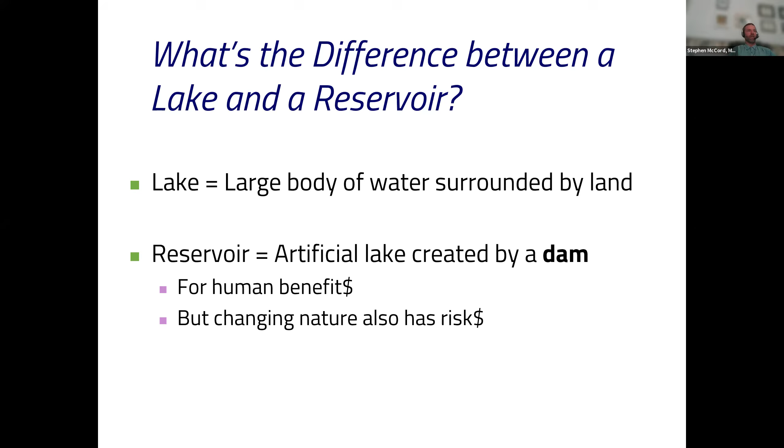Another key point is the difference between a lake and a reservoir. We refer to ourselves as the California Lake Management Society, and there are different definitions, but the broadest one that applies here is that a lake is a large body of water surrounded by land - very generic. A reservoir is specific: it's an artificial lake created by a dam. Often the definitions say a dam on a creek, but in California we have dams that are off channel, so we kept it more generic. The key things that make it different are that it's for human benefits - notice I put a dollar sign in there - and it also changes nature, and there are some risks associated with that. Today when we're talking about dam safety, that's a key risk. You put up a dam, you create these benefits, but now you have a risk downstream, and this is what we want to avoid.

I met Param, our first speaker, around when the Oroville issue came up, I think in 2017. This is a concern folks have everywhere, that a reservoir spillway or dam at some level is going to fail. These are pictures that were going around on the internet, and downstream communities were evacuated temporarily. Since then it's been very much, remember Oroville, let's not let this happen again.

Param's on the front lines of addressing that with the Department of Water Resources. Our second speaker is going to be talking about a specific issue in a specific area with seismic concerns, but I'll get to that next.

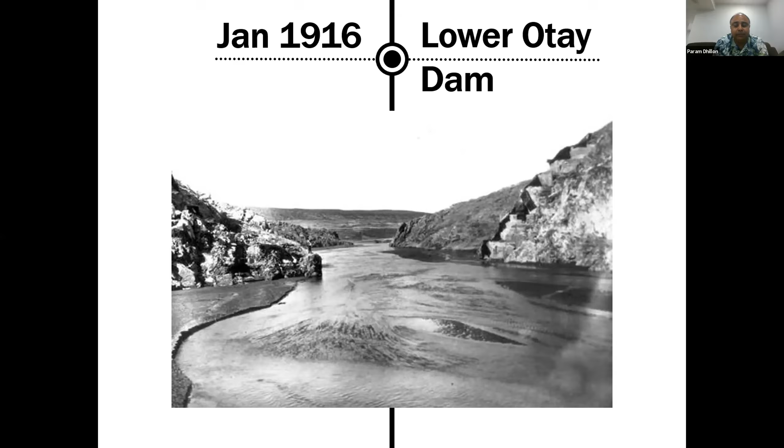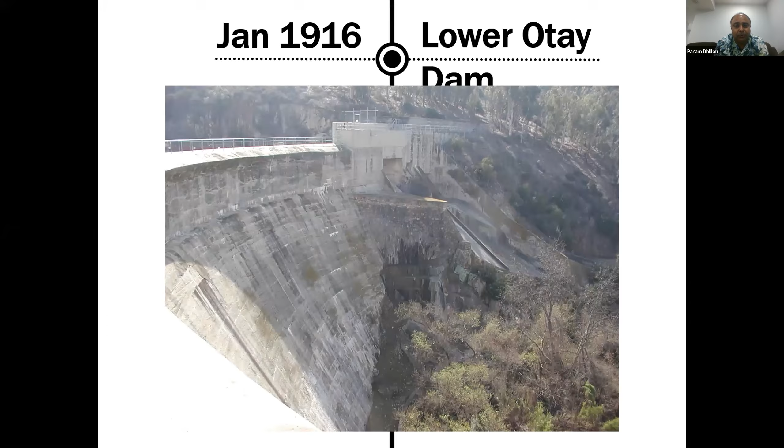1917 was when the first Dam Safety Act got enacted, but that was very, very generic, saying that everybody should be aware that there may be some potential for failure of dams, so everybody should do their due diligence to make sure the dams are built properly. But there was no oversight by any state agency or whatnot - it was all self-regulatory.

Then comes 1928. This is St. Francis Dam, this was right after construction. This dam was one of the bigger dams back in those days. As you see, there's some leakage right in the middle of this dam. This started soon after the dam was built, so everybody sort of had some idea that this thing is having issues.

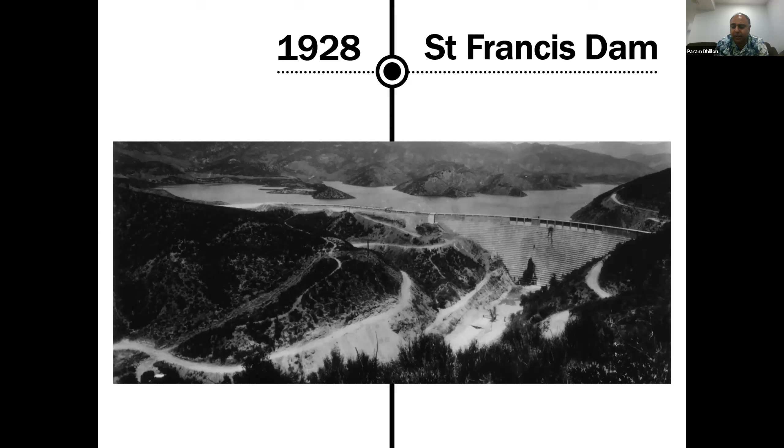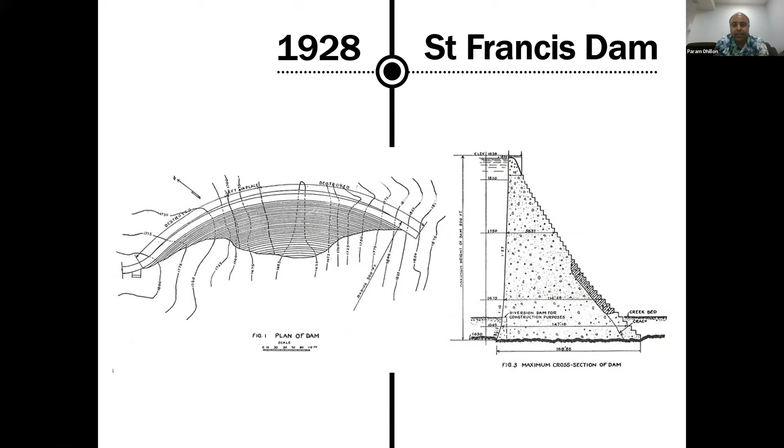So this is one of the pictures taken not too far before it failed. This is basically a concrete structure, a cross section and plan view of the dam. Look at the bottom of this bottom right picture. The dam is quite thick at the bottom, 166 feet wide at the bottom. So that's a good cross section, meaning these dams should withstand everything. But look at this dam now after failure.

What the designers did not put effort into was the abutments. Just like Sweetwater Dam, the dam itself survived, but the abutments washed away. And once the abutments go bad, this is the kind of things that happen to a dam.

By the way, there were about 400 fatalities after this failure. This failure happened in the middle of the night, so a lot of people got killed.

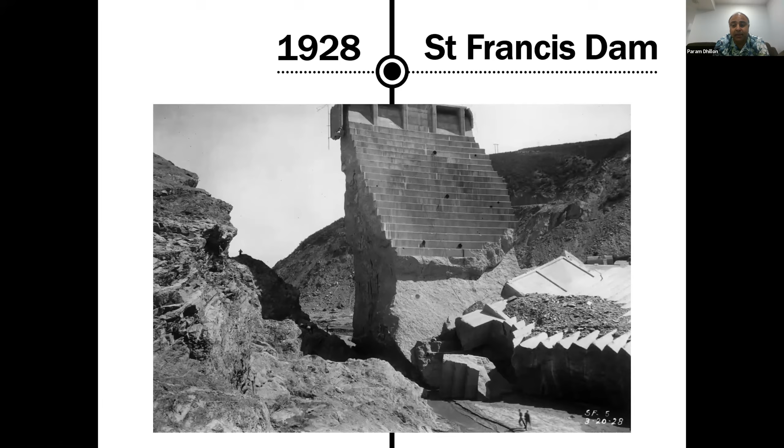This is another shot of the dam after failure for scale. Look at the gentleman right in the middle with a cane. And we are basically looking from the downstream side, looking at the reservoir.

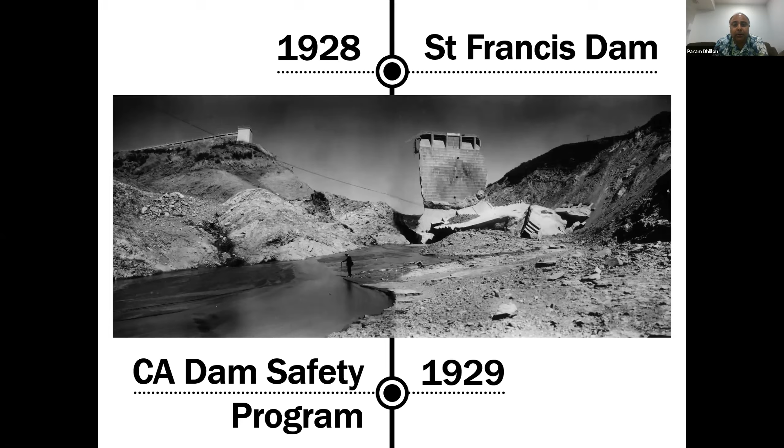And because of St. Francis Dam, 1929, that's how we came into existence. And that's the reason we are here today. So we have been managing every dam project since 1929. And the way we worked was we first brought all the dams which were not under jurisdiction into a jurisdiction. And once we did that, we also started looking at all the future dams which were being built.

Then come along 1963. So before that, only dams we used to look at were on-stream storage, not off-stream reservoirs. Baldwin Hills Dam is basically an off-stream reservoir where water was being pumped into it, and then it was being supplied to the cities downstream for water needs.

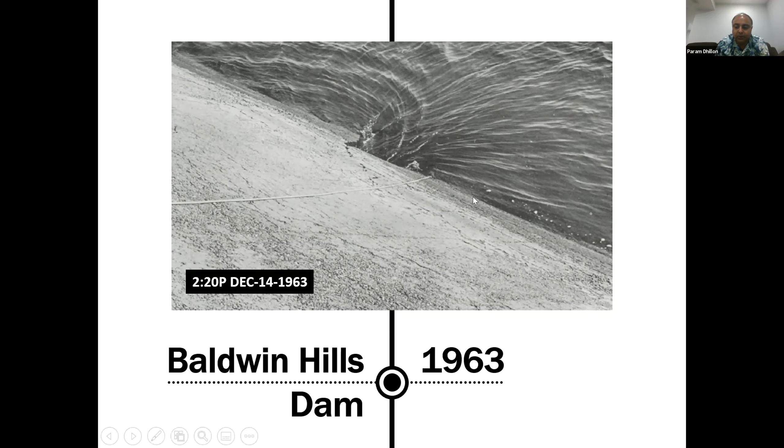At 2:20 p.m., a few minutes later, look at the size of this hole starting to increase. And look at the brave soul standing right there next to that sinkhole. I definitely wouldn't do that.

Now, as they're draining the reservoir, they immediately start draining it, but fissures already opened up. One fissure is right here on the top, and then other fissures are down here. By this time, downstream and all the drains were flushed with muddy sediment, meaning the drains got compromised on this dam.

As you see now, the hole is starting to get bigger, and the fissures going up above towards the crest are getting longer in length. Notice the timestamp on this. This only took about 1 hour, between 2:20 and 3:25.

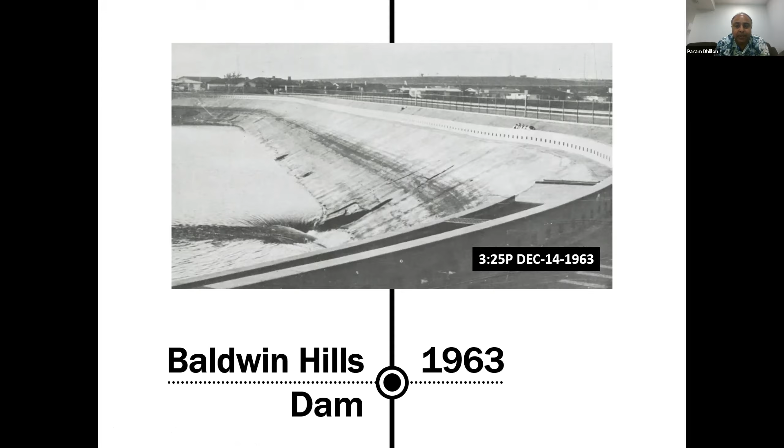The reservoir got dropped from that water line, which you see here, down to this elevation, but the damage was already done. The fissures were opening up, and the downstream drains were fully compromised by this time. This is what happened at 3:30, exactly 1 hour, 10 minutes since that dam tender saw that fissure. Notice another thing, the reservoir is still being dropped. They were using low-level outlets to drop the reservoir. So imagine if the full reservoir failed under this condition, it would have been very, very bad.

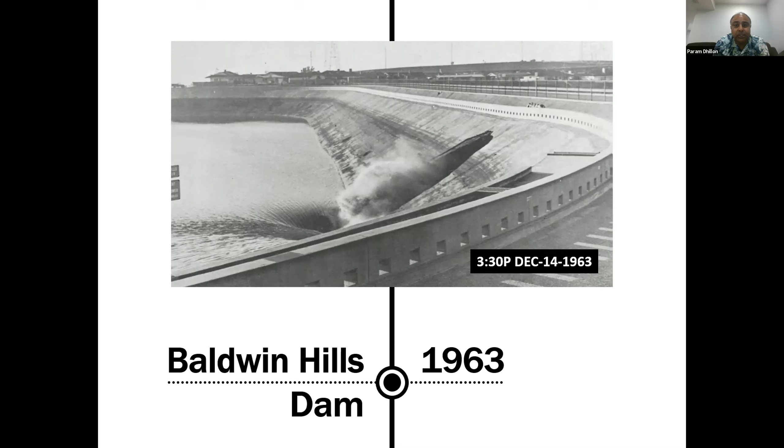But they were able to reduce the volume in the reservoir by using low-level outlets and draining it. But still, this dam completely breached around 3:35, almost 1 hour, 15 minutes later after the start of the first sinkhole. So after that, Baldwin Hills Dam, all reservoirs which are pumped reservoirs, also became under a state dam safety jurisdiction.

And here's a complete breach. And this is on the downstream side.

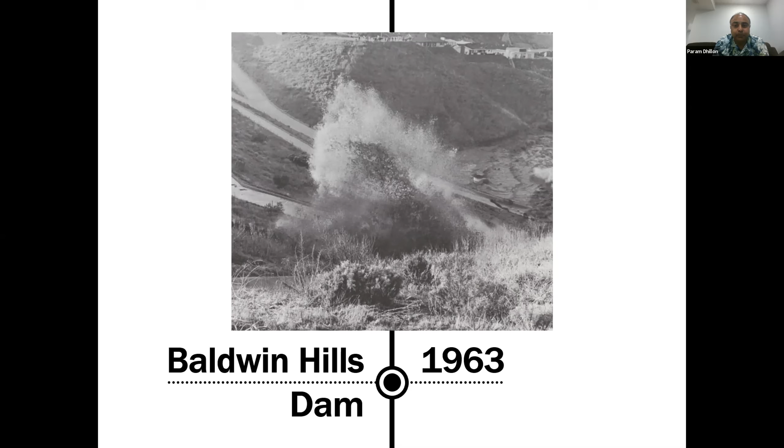And this is a full breach failure of the dam. So as you see, dams can do quite a bit of damage.

Then I want to show you a case of the 1971 Lower San Fernando Dam. Back in the early days, because equipment wasn't available, a lot of this dam construction was done using hydraulic fill methods, where you basically sluice the material between two rock berms and fill up the dam. The sediments settle in the middle of the dam, and the coarse sediments are on the sides, and you create your embankment.

But the problem with these kinds of dams was that they were very liquefiable, meaning a small earthquake will just slide these faces out. Imagine just like a landslide—when the landslide gets saturated, it slides out. That's exactly what happened at the Lower San Fernando Dam in 1971.

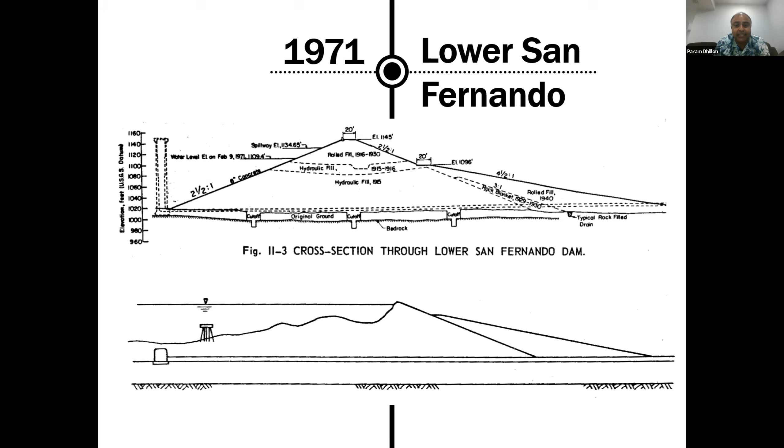One thing we did when we brought these dams under jurisdiction, once we figured out that a lot of these dams were built with hydraulic fill techniques, was to permanently restrict the storage. This dam was always held 10 feet below the spillway crest, so it was never full, because looking at this shot downstream, you can imagine what could happen if the reservoir was full and this dam failed.

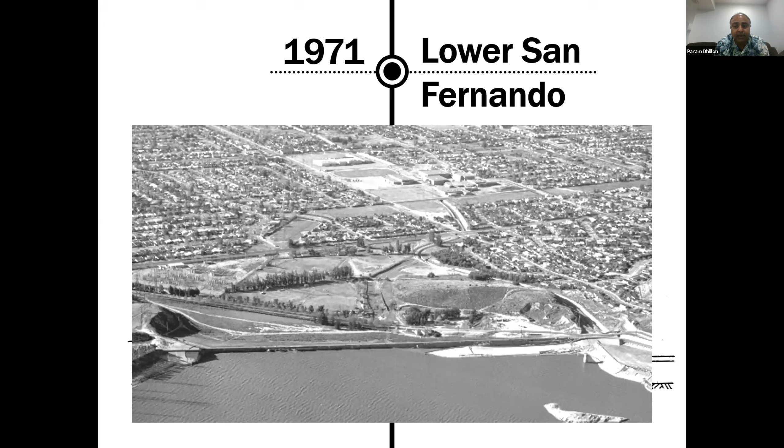So in 1971, after an earthquake, this is what happened to the upstream slope of the reservoir—it basically just slid into the reservoir. And this was under the full restriction of 10 feet.

And this is another shot. I wanted to show you that low-level outlet. Once again, the low-level outlet became critical because as soon as the earthquake hit, we were able to open the low-level outlet tower gates and evacuate as much water as we could. There were some aftershocks too, but we were able to prevent full failure or breach of this reservoir.

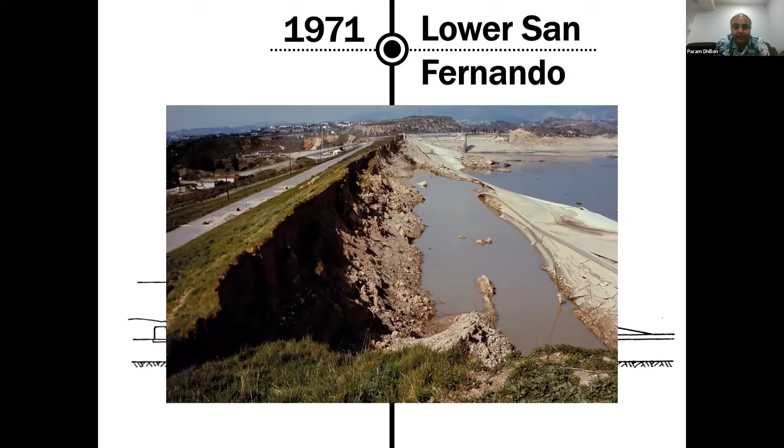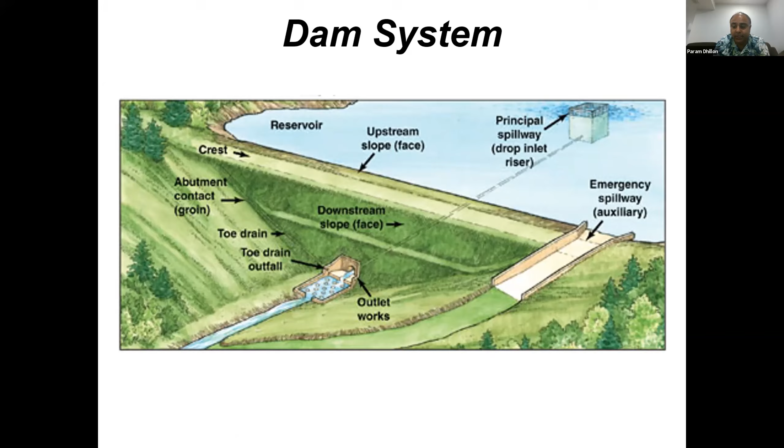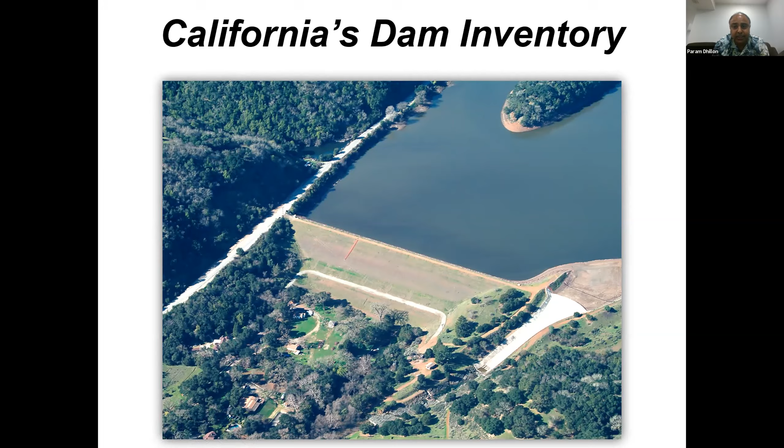This one doesn't have any outlet tower, so most likely the low-level outlet is buried—it's inside the reservoir, but there's a low-level outlet pipe underneath, and the pipe probably exits out here. You have the spillway on the right side. This looks like a large dam, because judging by the spillway construction, this reservoir sees quite decent flows come through.

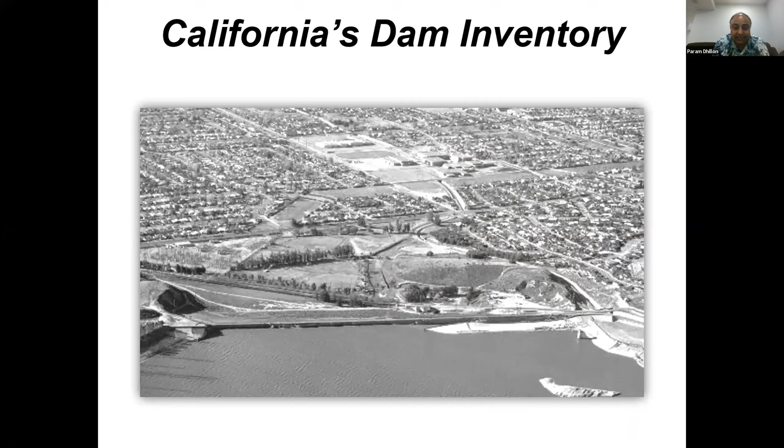This is another picture of San Fernando, basically telling you this is a hydraulic dam, hydraulically filled, and that was the reason this one failed.

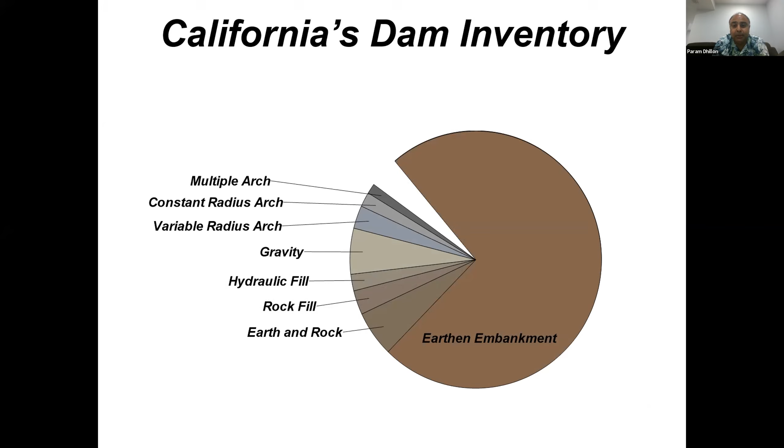After that, we go into concrete dams, and we have a variety of dams in concrete. We have variable arch structure, gravity, constant arch, multiple arch. So let's look at some pictures so all this jargon makes sense.

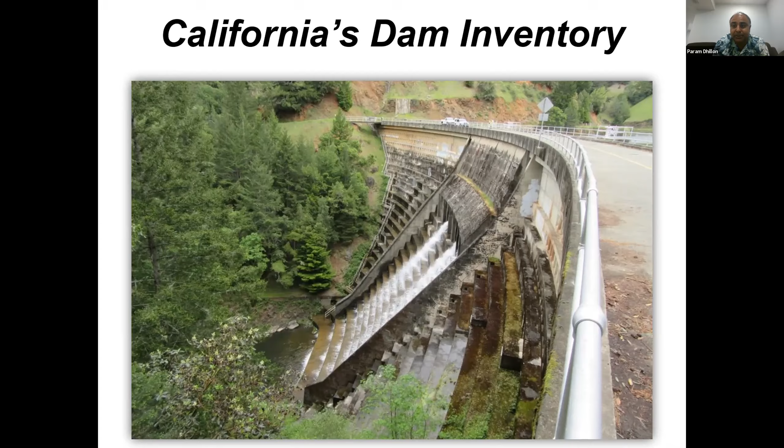This is a roller compacted concrete dam called San Vicente, in San Diego. This was one of our bigger projects, which we just completed a couple of years ago. The reservoir capacity used to be 90,000 acre feet, and now it's almost double that. I have a cool video which I'm going to run for you guys to see how this dam was built.

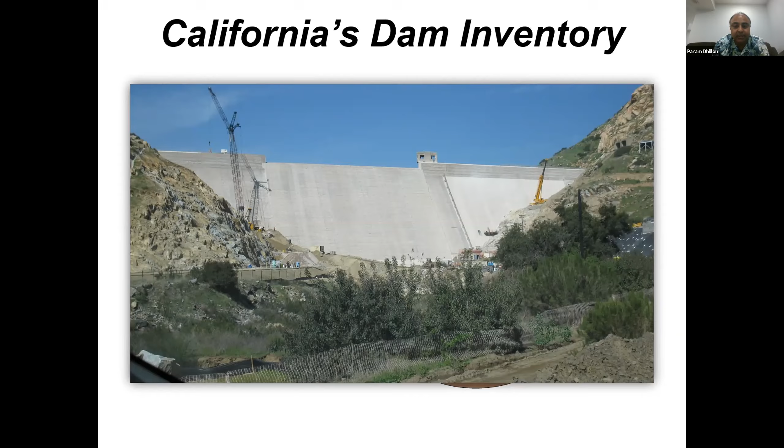Basically, this is the old dam, and the new dam was built right in front of it, and they were tied together. I have a time-lapse video which I'm going to play now. Sorry, the video didn't play. Sorry, gentlemen and ladies, the video didn't play.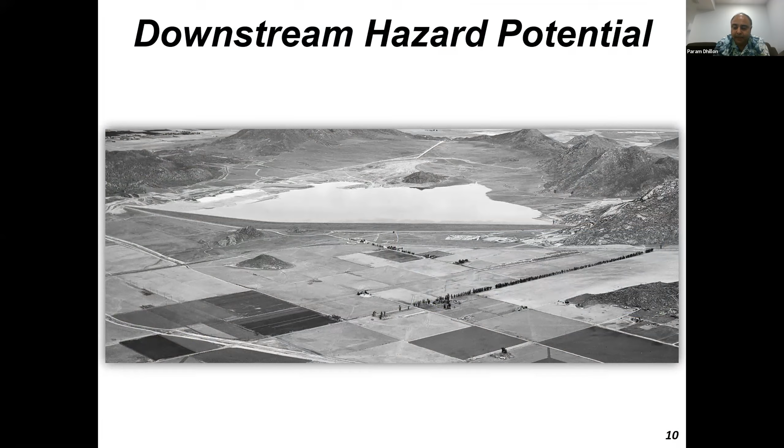One of the things we are grappling with now is the downstream development around dams. This picture was taken in the 1970s, I believe. This is the Perris dam up in Southern California, a state of California dam. When the dam was originally built, there was no housing downstream of it - there was no issue. This is a recent picture taken a few years ago. As you see, the dam which was built without any downstream hazard has now become a major hazard.

That's something we have been grappling with since the Oroville disaster. Here's a picture which should show you what happened between 1974 and 2014. The reason I'm showing this picture is that it's going to become important because after Oroville, legislation was passed which basically required every dam to develop an EAP, except for low hazard dams.

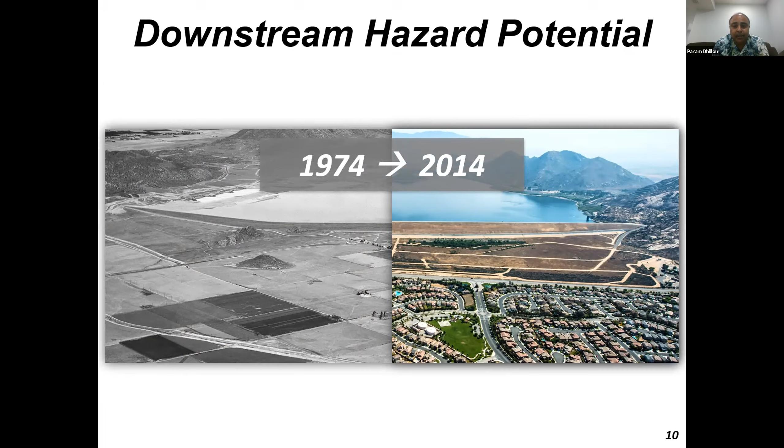This screen shows how many dams we have in the state of California. We have about 1,250 dams. Out of those, 204 dams are extremely high hazard, and 440 are high. Then we have about 277 dams which are significant, and about 327 dams which are low.

Here I'm going to plot, so you can see the color coding of these extremely high hazard dams. As expected, a lot of these are in Southern California, Northern California, the Bay Area, and along the foothills in the High Sierra.

Now what I did is plot some major faults. As you can see, a lot of these dams, especially the high hazard and extremely high hazard ones, are along these fault lines.

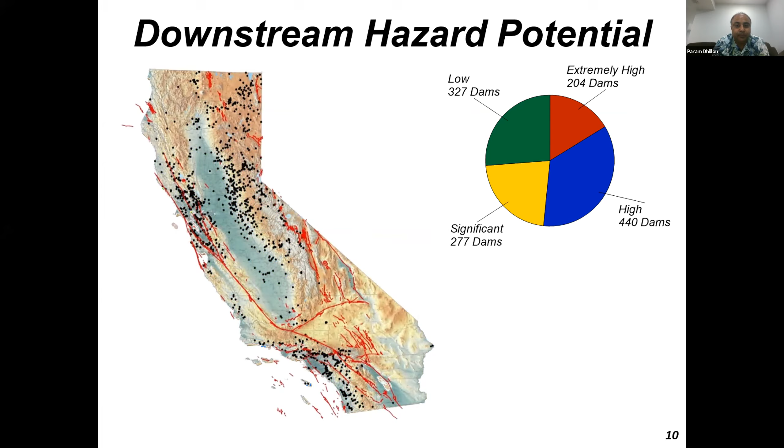This is how our division is set up. We have the office chief, then our own engineering geology branch, field branch. This is where I work now, the design branch, where I used to work, and then the reevaluation engineering branch, which I also worked in years ago. And then of course we have support staff to support us.

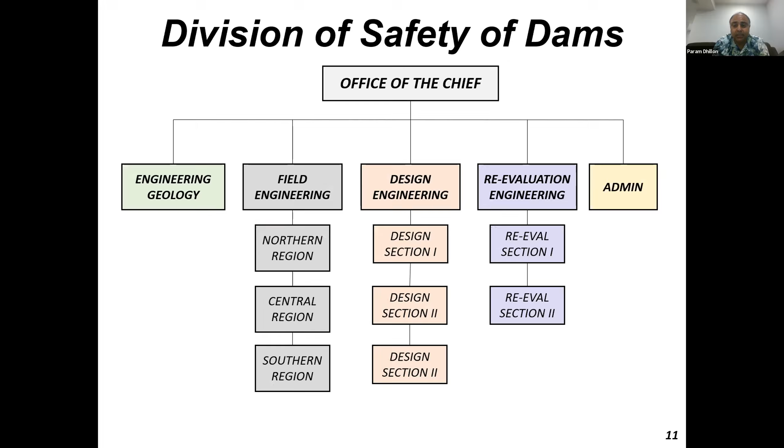One of the things we also do in-house is, regardless of whether an owner wants to do their own study, we do our own independent studies on every structure within the state of California. This is an earthen embankment, just as an example, and we do our own analysis to figure out if the embankment meets minimum safety standards or not.

This is one of the projects we completed a few years ago. Imagine a swimming pool downstream of a dam filled with kids, and nobody knows what this dam is worth, or if it's going to hold together. That was one of the reasons we evaluated this dam, to make sure the swimming pool is safe, because there are a lot of people in that pool.

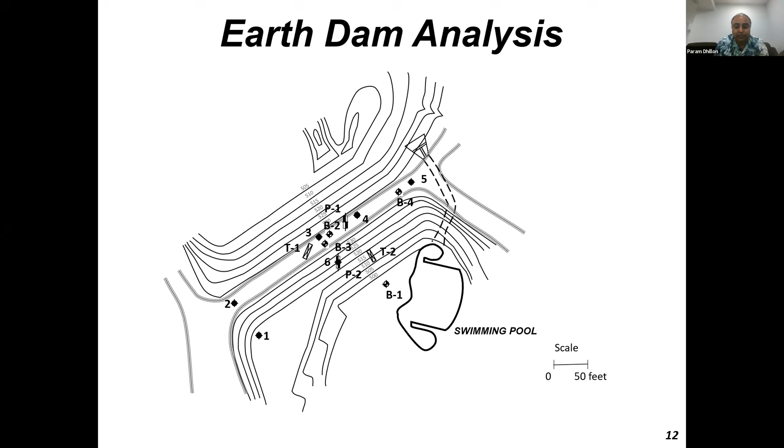Another analysis we do is a typical standard slope failure analysis. Everybody in our division is capable of doing it, and all 1,200 dams go through this evaluation.

Another way, and for some of the engineering folks in the group, this is how we do our seismic analysis. We put these dams through seismic analysis and figure out if they meet our minimum safety standards.

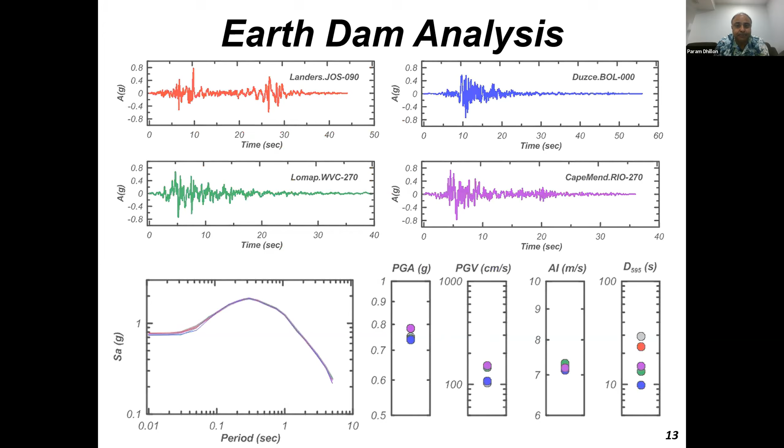So these are all typical analyses we are doing on these structures, and they're all independent of the dam owners. Dam owners also do their own, but we also check and verify.

Then the next portfolio group we have is our concrete dams. We use various software such as SAP 2000 and LS-DYNA to evaluate these concrete structures.

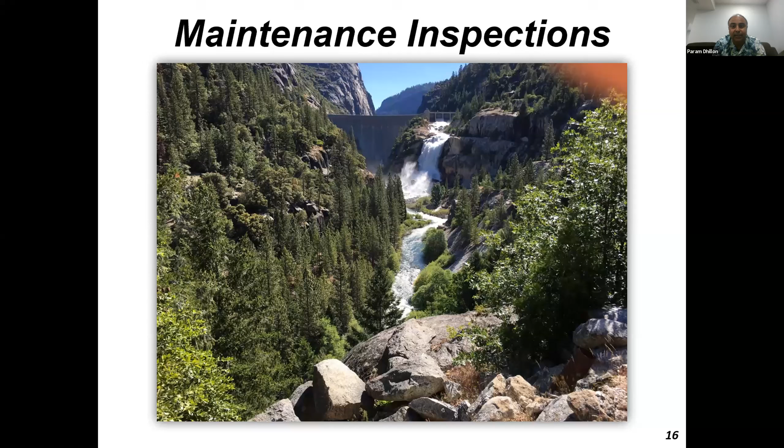Maintenance inspection is one of our biggest jobs in the division. We inspect all 1,250 dams annually. That's quite a bit of dams. This is one of the shots I took years ago of Donnell's Dam up along Highway 108. I was heading up there to inspect, and this was a cool picture.

This is another kind of dam. This is a rockfill dam up in the High Sierras, and these are inspected annually. Some of the extremely high hazard dams are inspected twice a year, depending on if there are any issues we're concerned about.

On an inspection like this, we will walk the left groin, which is along this side safely, then walk along the toe, then walk around the right groin, and walk on the upstream face if it's easily available. We exercise the valves, cycle the spillway gates if available, and cycle the low-level outlets.

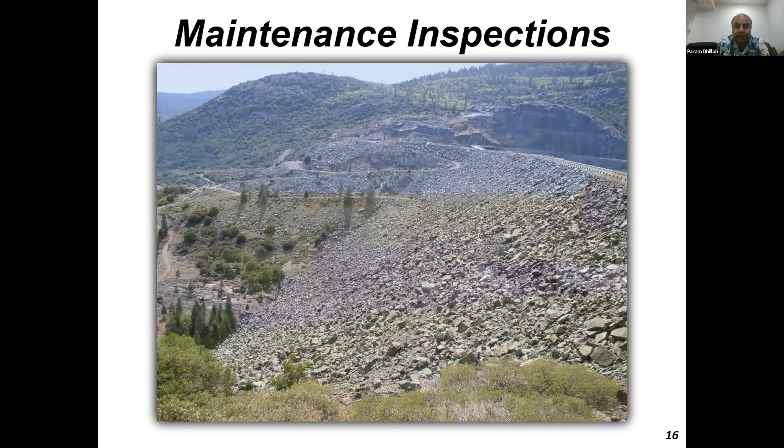This is another small structure. We look at big dams, small dams, farm dams, and some homeowners association dams. We have a vast variety of ownership, including Southern Cal Edison, PG&E, LADWP, State Water Resources dams, and a lot of farming dams.

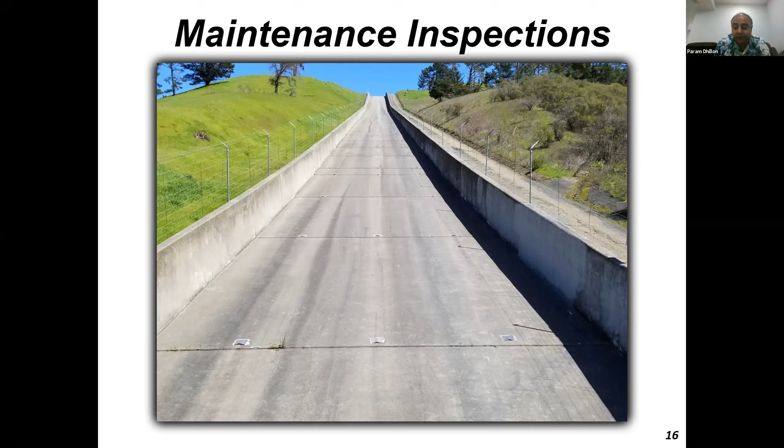Our inspections always involve walking around the spillway chutes, making sure the spillway is in good condition for usage. We walk through lots of tunnels—this is a nice tunnel with not too much water—but we also have tunnels where we are waist deep in water, wading through to check things.

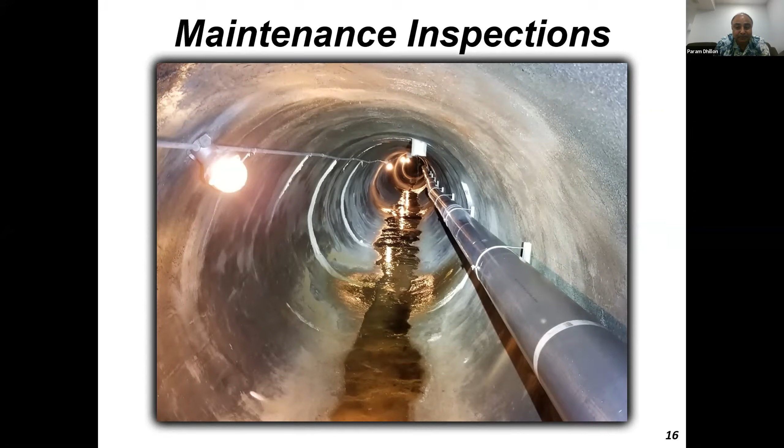For radial gates, we have our own team that actually climbs the gates every so often to make sure they're performing well. We also have a special program where every third year, all radial gates need to be cycled in DSOD's presence.

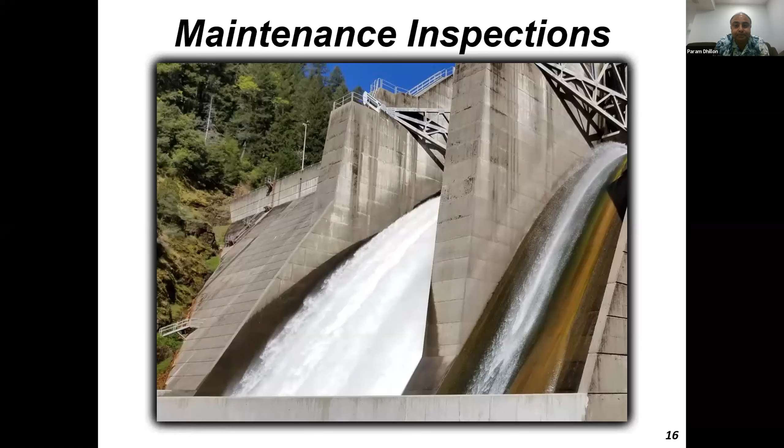This is another shot of the radial gate on the right side. As you can see, there's some leakage.

We always cycle low-level outlet controls. This is one of a massive dam with a low-level outlet control being cycled on an annual basis.

This is one of the dams we also inspect, which basically involves walking up the groin. That's a lot of stairs on both sides to get to the dam, but this is done annually or biannually.

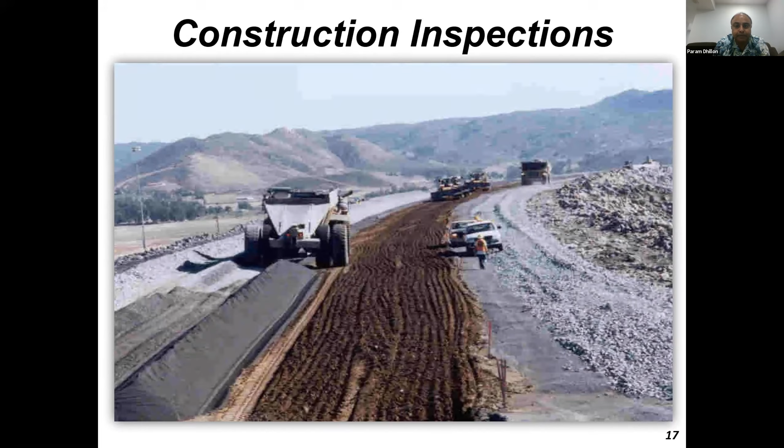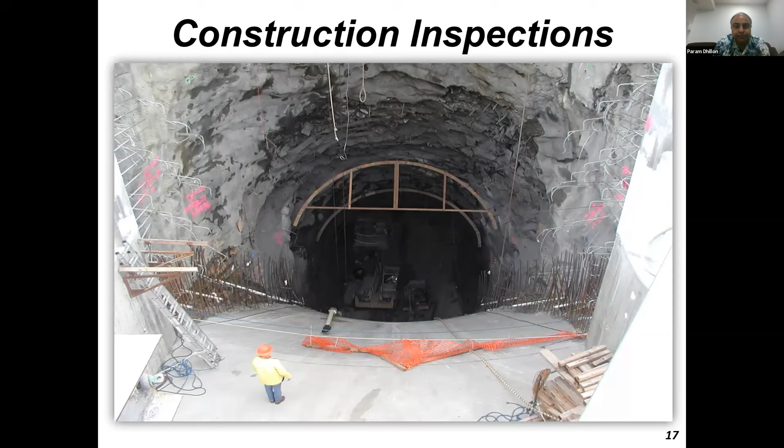This is a dam where we basically removed the old low-level outlet liners and put in new ones. At the bottom right, you'll see those steel pipes. We pulled out the old pipes and installed three new pipes, then put brand new slide gates on the upstream side of this dam.

Maybe this is where the video will work, I was having issues. So remember I talked about San Vicente Dam? This is the construction of the San Vicente Dam in the San Diego area. The original dam was about 220 feet, but now it's at about 350 feet in height. The reservoir basically doubled. This is all drinking water for the San Diego area.

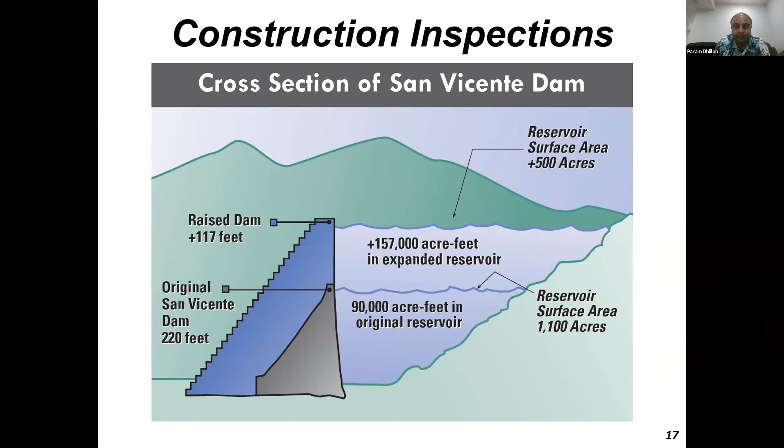As I said, this was the original dam, and now I think the video might play. There we go. Param, how many more slides do you have? I have about... I can skip through some. Am I coming on time here? Yep, okay. How many more minutes do I have, Stephen? A couple. Oh, okay, I can go through it. All right, great.

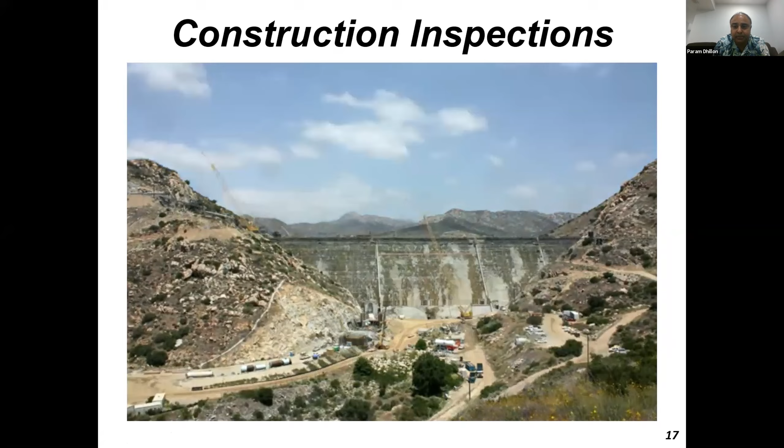So you see here, the new dam is being built in the front, and it's being tied to the old dam. We are right now at the crest of the old dam, and the new dam moved up by 120 feet. This was one of the largest raises in California.

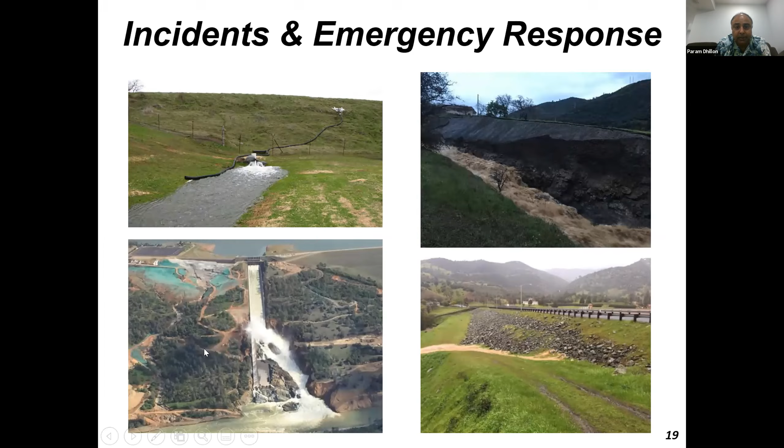This is one of the biggest things: we do not allow overtopping of embankment dams. This is just the kind of failures we see. There's a leakage on the bottom right, you see the reservoir leaking. Top right, spillway walls failing. Obviously bottom left is Oroville, and top left is where you have leakage through the embankment.

Stephen, I think I'm going to probably go toward the end now because timing is going to be an issue. Yep, so that way. So one of our biggest challenges right now is this slide. I wanted to make sure I could show this.

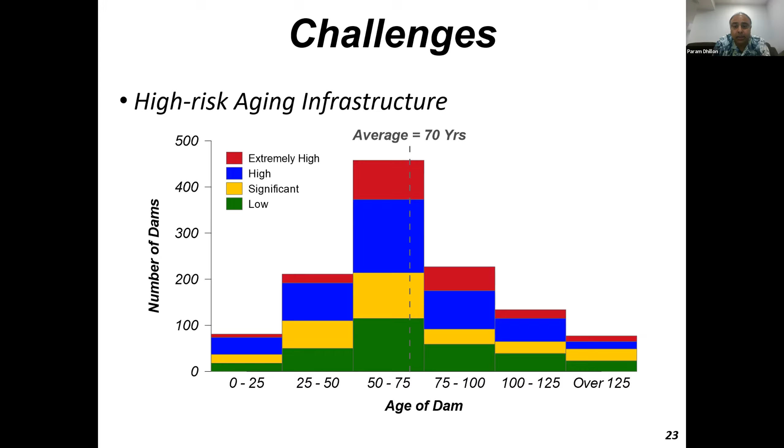This structure—right now the majority of the dams in California are between 50 and 75 years old. But guess what, the majority of our high hazard dams are at that age. Look on the top, look on the left side, and you'll see that the majority of our extremely high hazard dams are about 70, 75 years plus. So this is one of the challenges the division is facing moving forward: how are we going to manage our portfolio given these risk assessment scenarios.

High risk aging infrastructure, resource and funding limitations. Another thing we are running across is dam safety expertise. Most of the people who worked in the industry have retired, and the talent pool is quite shrinking.

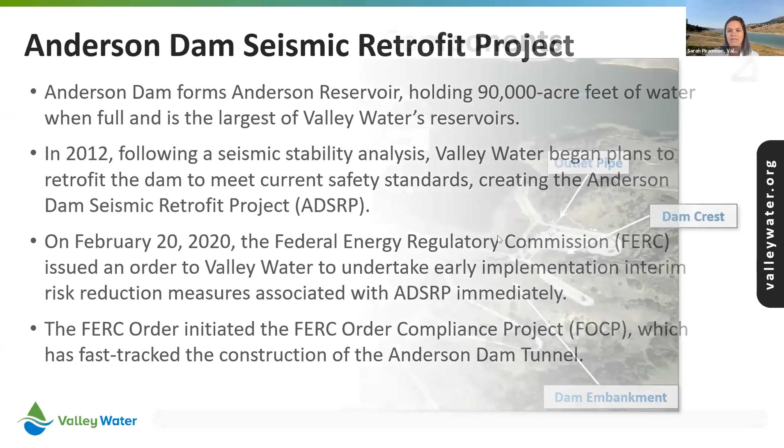All right, so this is just an overview of what our dam looks like from the top. Some of those same components that were introduced earlier - so it's our earthen embankment. And you can see this is actually where two creeks converge, and they would go through here.

It's called Coyote Creek, and underneath this earthen dam is some liquefiable material, so that's one of the big concerns. We also have a spillway here that doesn't meet modern spillway standards, and our outlet pipe is also vulnerable to fault rupture.

So some of the existing components that we're going to be retrofitting. This is another view of the dam from the top, and you can see that the embankment is pretty big. The larger retrofit project is going to have to scrape all the way down to bedrock, get rid of all the liquefiable material, and then rebuild it.

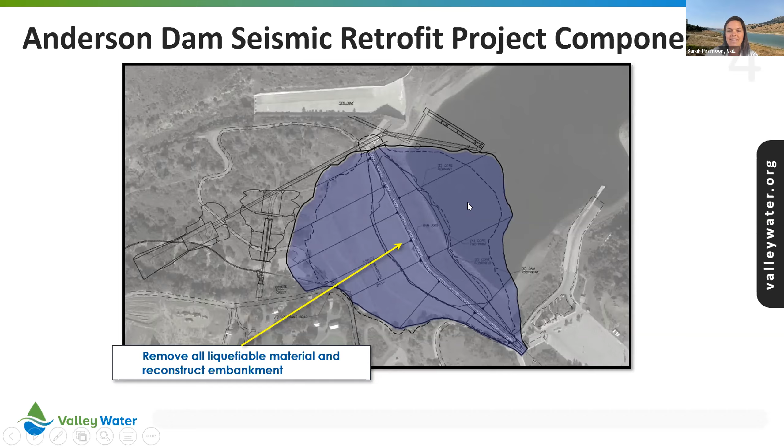It is going to take quite a few years, and it's compounded by the fact that this needs to remain safe throughout construction, because there are quite a few people who live downstream of this dam.

There's our spillway that will be retrofitted to post-Oroville standards. And here is our low-level outlet works. We currently have a low-level outlet works on the other side, and it's going to be moved to the other side. The temporary diversion system uses the same tunnel as our low-level outlet works.

This is the part of the project that we started now as part of our interim risk reduction measure. It's a massive tunnel that goes through the side of the abutment and underneath the dam, almost creating a big bathtub drain that could be used in an emergency. After the dam is constructed, that diversion structure will be repurposed as a high-level outlet works, a redundant system to our spillway.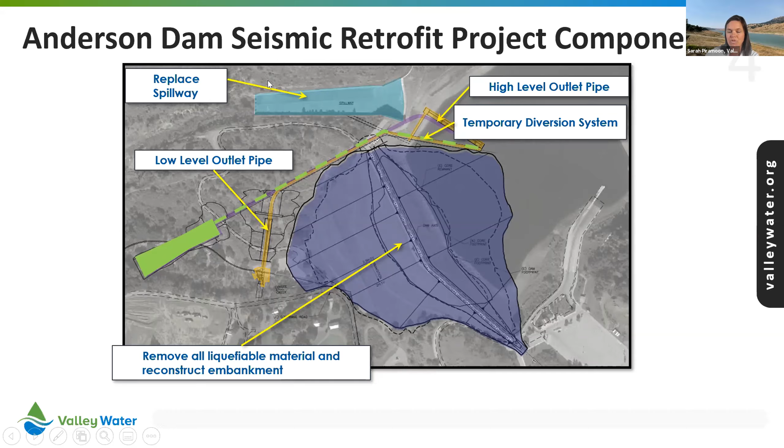And I do have a video here. I know, hopefully this will work, but we recently did start construction on the Anderson Dam Tunnel Project. It's pretty monumental, and this video has great footage of what it looks like from above, giving you that context of all the downstream communities and the constraints we're working with, as well as highlighting the involvement and support we've had from our elected officials. So let's hope this video works.

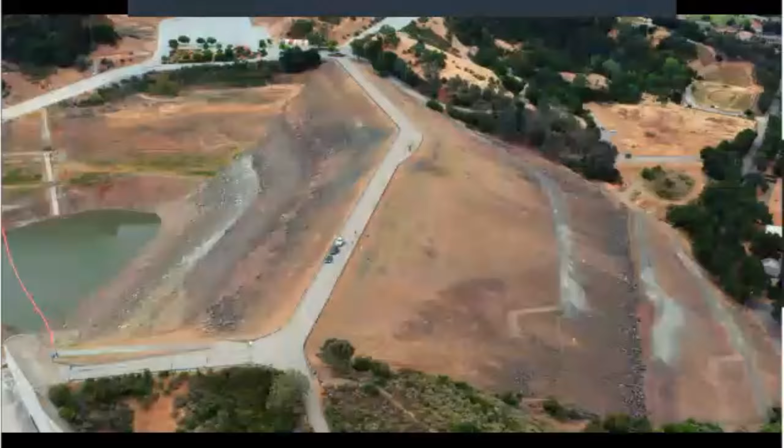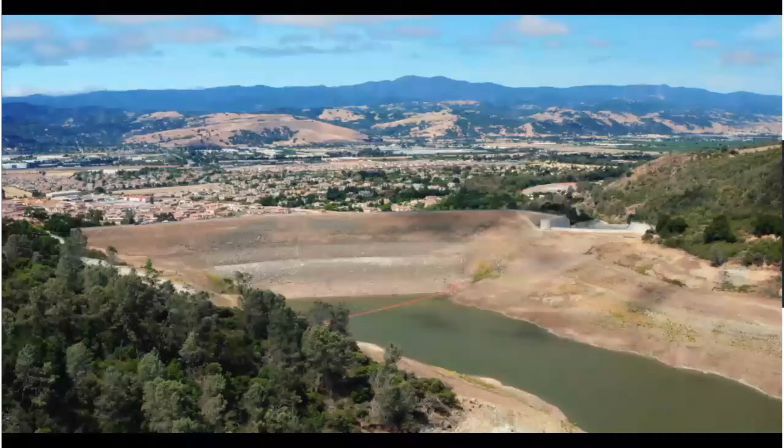Let's see if this works. It's always good to have these kind of ceremonies because this is the start of something big. Shovels in the ground. A critical project to protect the public and secure Santa Clara County's water supply is underway. Strengthening Anderson Dam, which impounds the largest reservoir in the county. The Anderson Dam seismic retrofit project will prevent it from slumping in the event of a large earthquake by rebuilding the dam built more than 70 years ago. Anderson Dam was a state-of-the-art project in 1950, but it was built near a seismic fault line. That is why we need to make sure it can withstand a large earthquake to the best of today's standards. A strong earthquake could damage the dam, causing a catastrophic release of a 30-foot wave of water that could inundate land more than 30 miles north to San Francisco Bay and more than 40 miles south to Monterey Bay, including much of Silicon Valley. At Valley Water, we are committed to protecting the community from the risks of earthquakes and other emergencies, like the severe drought currently impacting us. And that's why fixing Anderson Dam, which is our largest dam, is our top priority.

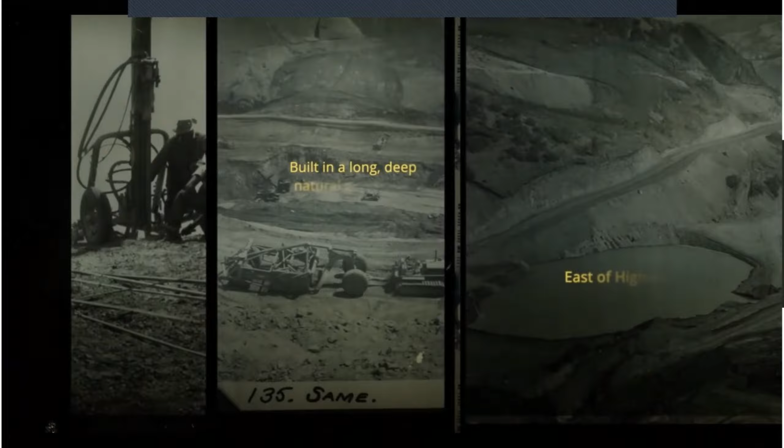Built in a long, deep natural gorge east of Highway 101 in Morgan Hill, Anderson Reservoir is named for Leroy Anderson, the first president of Santa Clara Valley Water District. Anderson stores local rain runoff and water pumped in through the Central Valley Project, an essential source of drinking water and groundwater replenishment. Anderson Reservoir is actually our largest of our 10 reservoirs. It can, at 90,000 acre-feet, hold the other 9 reservoirs within its footprint, so it's obviously a critical part of Valley Water's water supply portfolio. The reservoir can store enough water to serve about 1 million people for a year. Today, it sits nearly empty.

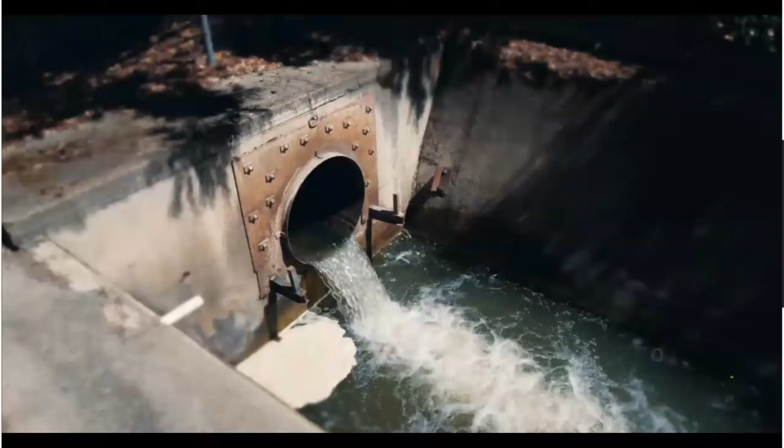The Federal Energy Regulatory Commission ordered Valley Water to drain the reservoir to 3% capacity to reduce seismic risk during construction. So for the next 4 years or so, you can expect the water level to get no higher than it is now. Probably year 5 on, we'll actually drain it so it's bone dry so we can do the embankment reconstruction. The first step is fast-track construction of a larger outlet tunnel, giving us greater control over water levels and increasing public safety. Then we'll rebuild the dam from the ground up.

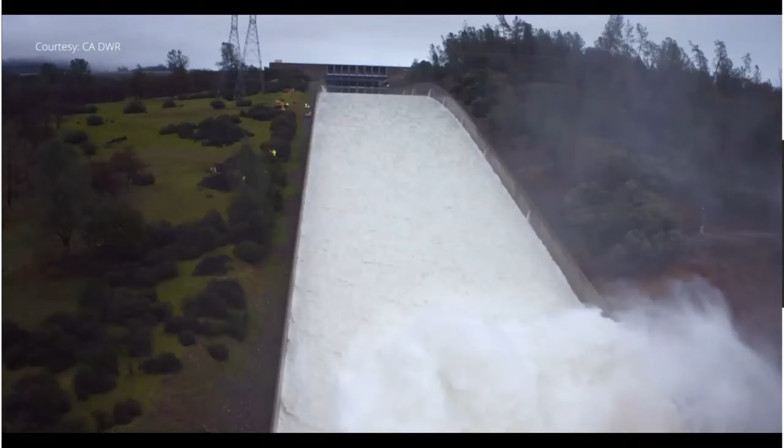When we originally started the project, we thought it was a 3-year project. The retrofit project has expanded 3 times since it began in 2012. Initial analysis indicated the dam didn't meet modern-day safety standards. Then in 2016, studies revealed previously unidentified fault lines, meaning more extensive work was needed. Then came 2017, the Oroville Dam spillway failure. In the wake of that crisis, new state standards required Valley Water to replace the spillway at Anderson Dam.

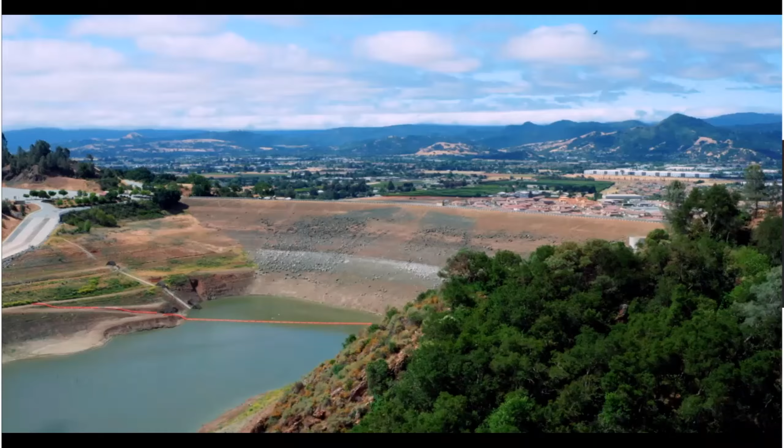Valley Water is working closely with state and federal regulators to modernize the dam for the long term, while minimizing impacts to ratepayers. There's actually over 13 agencies involved in permitting this project. It's been a monumental lift, and everyone understands the criticality of the facility at this point. It needs to get done. We can't have this just sitting out there, empty, and as a risk.

Beyond seismic safety and water supply, the retrofit helps prevent and reduce impacts to the environment and endangered fish. As part of a settlement challenging our water rights, Valley Water will restore habitat and provide water for endangered fish. As part of this project, we will be improving fish barriers downstream in Coyote Creek. We'll be restoring some areas that provide habitat to fisheries and wildlife. Once the project's completed, we're going to be in a better position to provide more water to the fishery in addition to providing water for water supply.

The project is expected to take 10 years, with the first few years spent constructing the new outlet tunnel and the next 7 to 8 years to completely rebuild the dam.

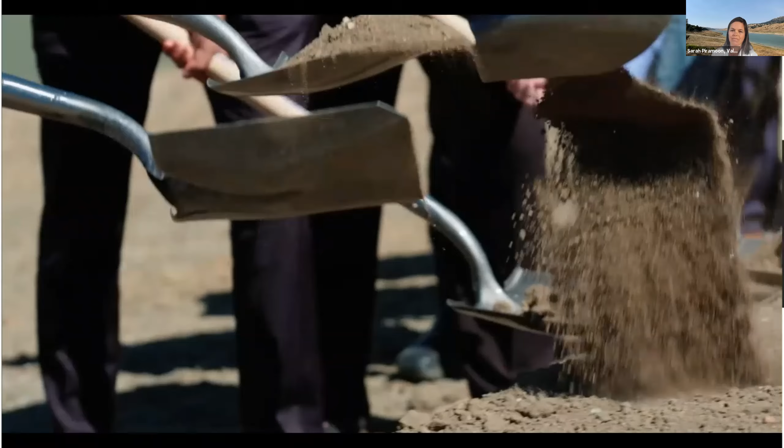This is truly not just about what's happening here, it's the impact it has for many, many miles around here. And ultimately, it's about our water safety, our water quality, water storage. So this is a regional project with regional protection. I just want to thank the district for taking on this gigantic public works project. It's a public project that's going to keep the community safer, that's going to protect our water supply, that's going to create jobs, and this can be a model not just for our county, but for the state and the country.

Oh, I'm very proud to be part of this project. This is a once-in-a-lifetime type project. It's the most important project for Valley Water today.

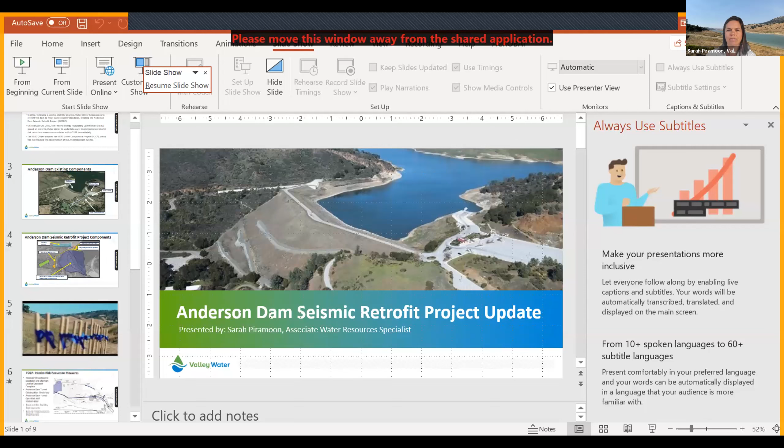Okay, so back to the technical pieces of it. We received that FERC order compliance project last February, and the video kind of showed it. The first part of it was to draw down the reservoir to the lowest point that we could, what we call the dead pool, or elevation 488—basically the lowest point we can drain it to with our existing intake structures. We've been able to maintain that elevation since last December. We had a dry winter, so it wasn't exactly easy, but we were able to do it. Sometimes this reservoir can fill up really fast, and that's part of the reason FERC really wanted us to get started on this tunnel project as fast as possible.

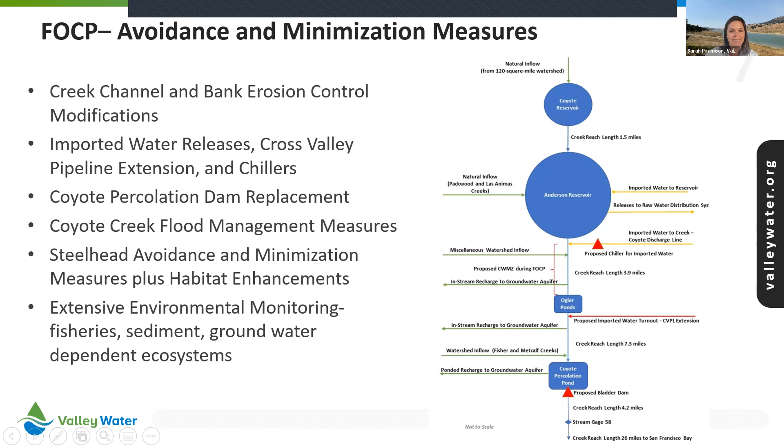With the FERC order, it really split our project into two different actions. So we're in this Anderson Dam tunnel phase, and they've just started construction on the tunnel. It's going to be another 3 years that we expect construction to happen on the tunnel itself.

Meanwhile, while that is all happening, and we've gotten all our permits underway, we are doing the environmental review and permitting for the larger reconstruction project, when we will actually take the embankment down, and it will be scraped, with all the liquefiable materials scraped out and the spillway replaced. That would be starting in 2024, continuing all the way to 2031, with the reservoir being back online in 2030.

So this is a 10-year outage that we are just getting started in. The drought has definitely not made things easier for us in Santa Clara County, and for those of us who work in water, it's on the forefront of most of our conversations.

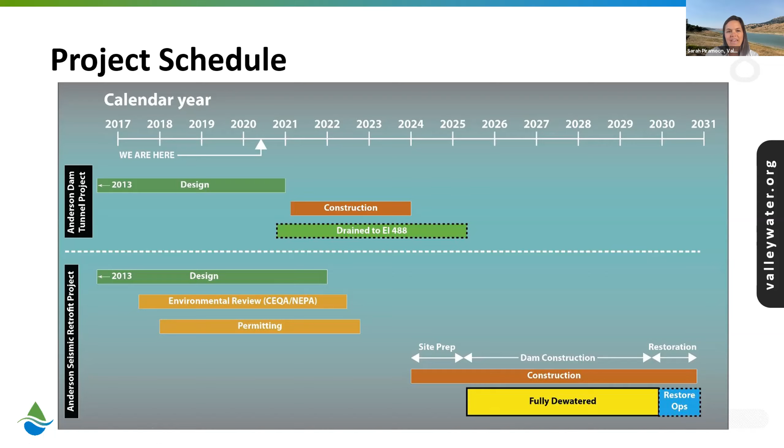But we're trying to get it done as fast as we can. But it's still just getting started. So with that, I think I'm going to hand it over for questions. I hope you enjoyed a little snapshot of where Anderson is right now.

Thanks, Sarah. So we got a couple things first. Mark, can you give me the control? Can I screen share? Yeah, it looks like I can. Hold on, let me do this.